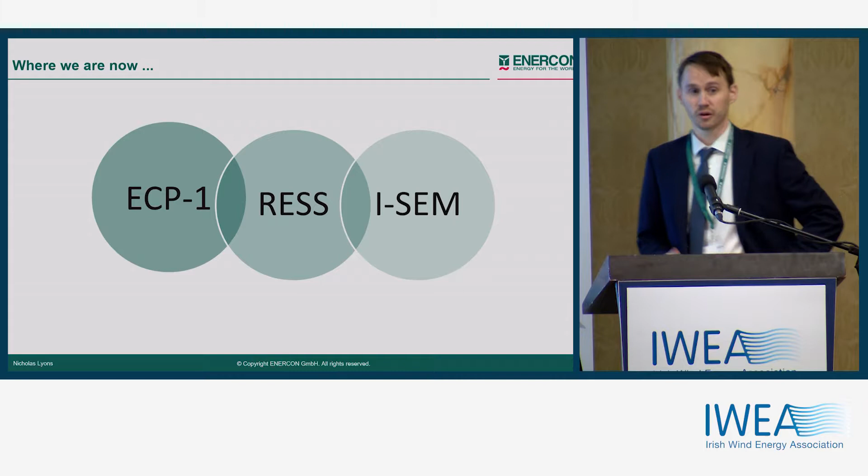So, ready for change, ready for new challenges. So we're very proud of what we've done. We have a good team on the ground. And as we look to the new challenges that are coming, we feel that we have the team to take

forward. We're looking to leverage that experience for our customers in Ireland with a full collaboration of services to offer a flexible level of solutions and strategies that will meet the customer's needs.

Whether that is pre-planning, site optimization, design, which involves a number of discussions between developers and planning consultants. We feel that this is a good approach and leads to very good optimization on site, and it's a good iterative approach to be involved in that process.

We'll also continue to offer EPC contracts for full turnkey contracts, taking on substations, cabling works, hard stands, roads and foundations. We have successfully done this across a range of projects in Ireland, and it works extremely well when there's tight deadlines or cost certainty is the driving force, which I think would be very important within the RESS 1 scenarios.

We have in the past offered equity to help projects cross the line, and we will continue to do this where traditional funds are not there to step in. It's yet to be seen whether this has much appetite with ECP1, but the offer is there.

Service contracts will, of course, be one of interest that we continue to offer with various options depending on the level of risk appetite of the developer. Either with limited liability or various structures in place depending on the actual appetite of our developers, your experience, or whatever your strategy is.

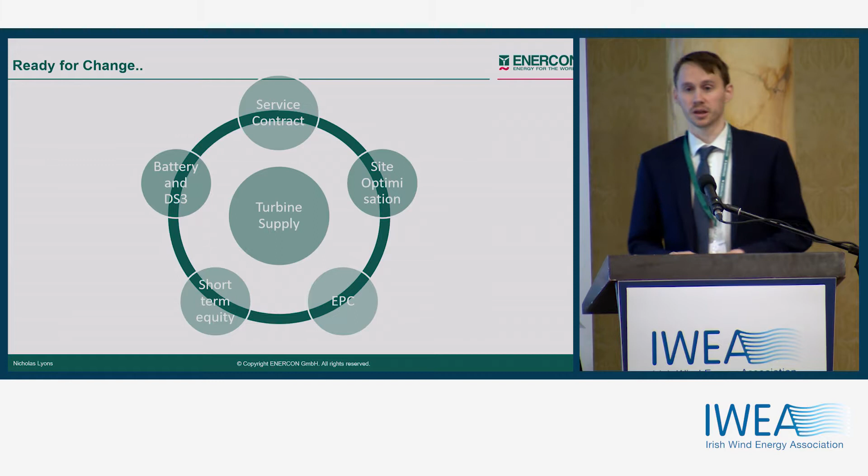And of course, we will also have additional supporting technologies, batteries and DS3 system services that we will offer to customers, and we will be chasing those DS3 capacity auctions. And of course, at the centre of all this is turbine supply. Yes, we do make turbines. So,

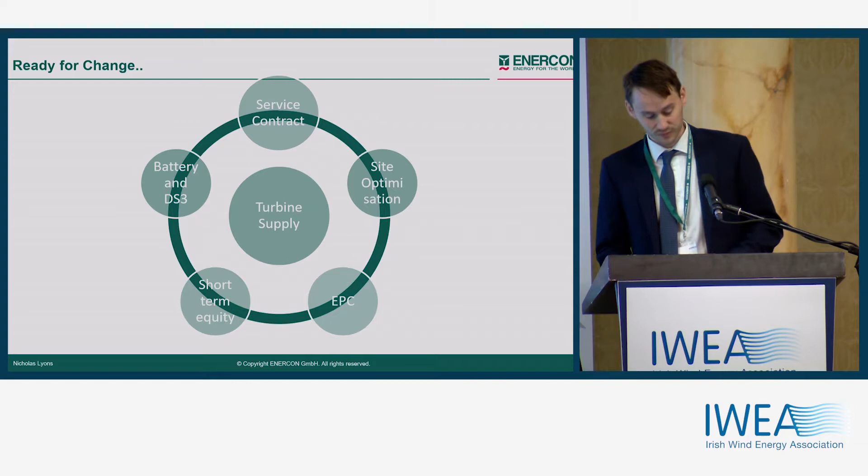our product range now, as we look at what was successful in ECP1, we will continue to offer the EP1, which is our sub-megawatt turbines, the E44s, and also we will continue to offer our EP2 platforms, which obviously was our traditional big seller, the E70s, E82s

and E92s. But we will also now, for RESS 1 and RESS 2, we think this will be the main area which will be most attractive to developers. This is our brand new platform, the EP3 platform. And this will be across a range of blade lengths, 115, 126 and 138.

Our new EP3 platform is a significant design change. The new EP3 platform has been designed specifically with auction systems in mind, with particular focus on reducing LCOE. We are just building on the traditional direct drive concept, which has been so successful for Enercon, with the key aim of lowering costs and higher efficiency.

The obvious change is the change in the nacelle. We no longer will have our lovely Norman Foster nacelle, we will be reverting back to the collar design, which we've seen more on the E40 machines from the 90s.

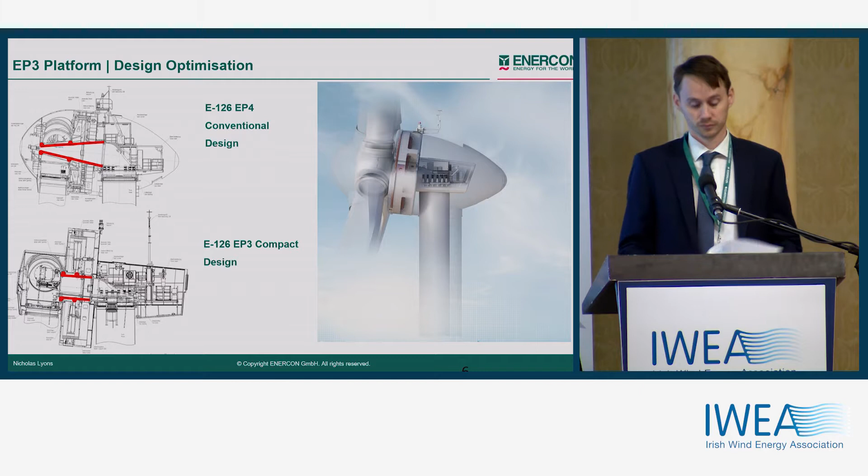The redesign brings multiple benefits in terms of on-site installation and reduction in on-site works. Components will become pre-made in the factory. Connections are easier on-site.

The other internal fundamental change is the generator. The generator traditionally has been hand-woven copper windings. This will now change to pre-formed aluminium windings. This obviously has inherent cost and weight savings. It's also simpler, faster production, again leading to better costing. Better protection against humidity, dust and air as it is also encased, and improved efficiency as the voltage increases.

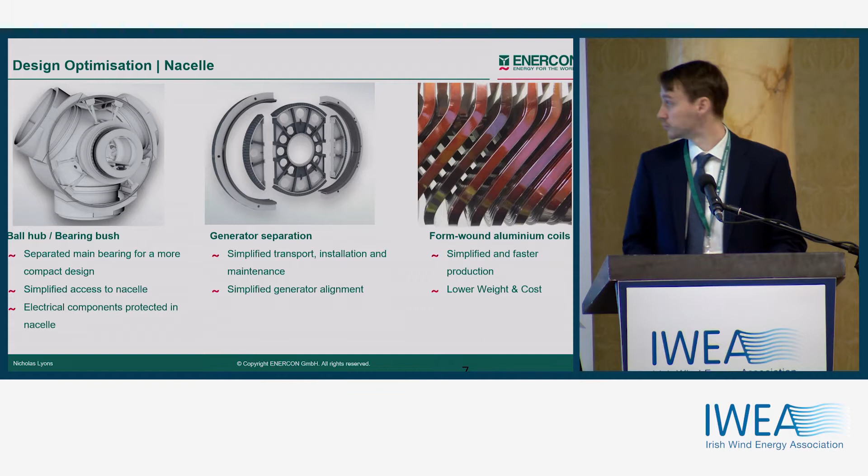We installed the first prototype in August for the E126, and as you can see, the actual installation times, man hours, have been drastically reduced, by over 50% reduction of assembly time. So these are all costs and installation costs that we will be passing on to the customer.

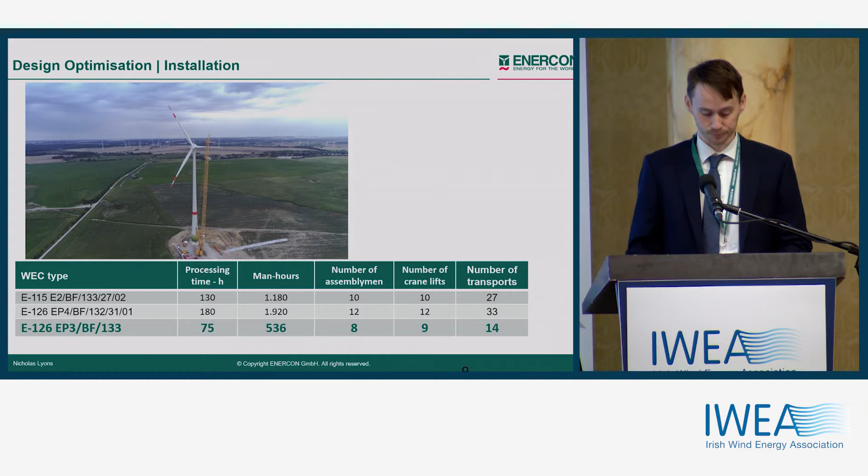Blade design, always a favourite topic of Enercon, very famous for very efficient design of blades. Previously with the EP4 platform, we offered split blades, but we are no longer offering that. It'll be one piece. This obviously has issues for transport, but the cost advantage is much more significant. And as we have shown in Tipperary, there are ways around these issues.

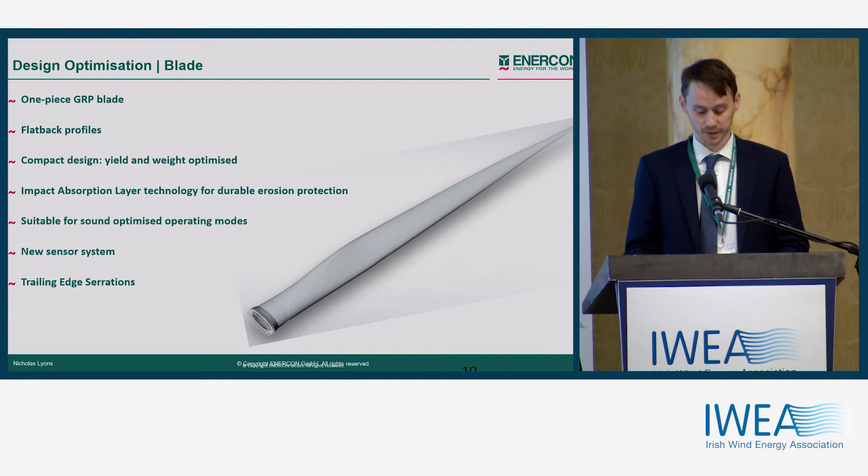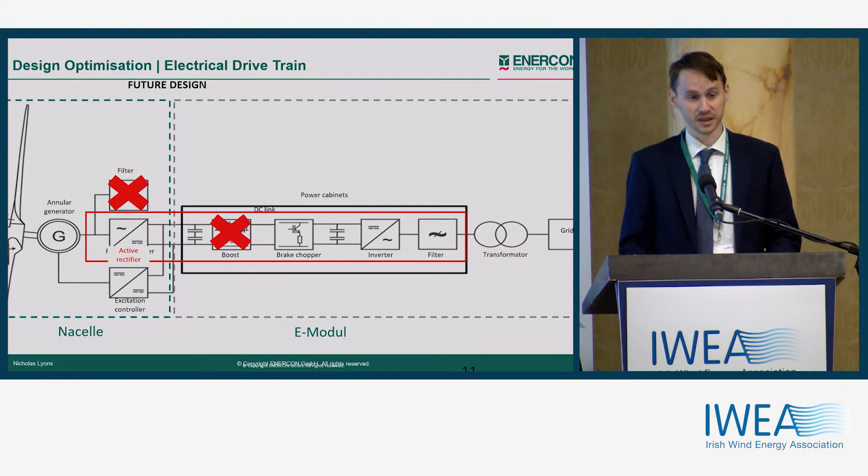So Enercon's success for the past two decades is in large part due to our direct drive and full inverter technology, which has only really been possible through our mastery of power electronics. Over the past number of years, we've been working away quietly in our research and development department in Aurich on a number of key innovations. These are our active rectifier and back-to-back inverters. This has enabled the move to aluminium as the voltage increases, and all of the preceding innovations and improvements that I've just talked about. Innovations in one area leading to improvements in others.

In effect, the rectifier moves to the basement, again reducing the weight in the nacelle, removing the filter and the boost within the power electronics. Again, reducing the number of cabinets, again reducing cost.

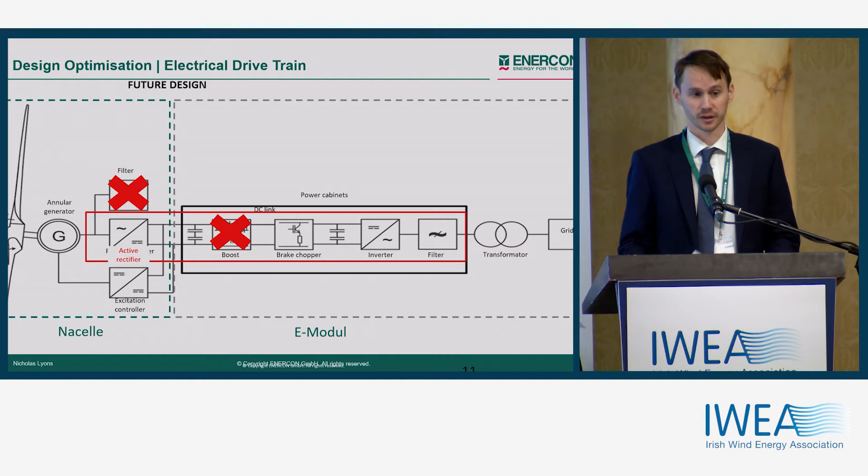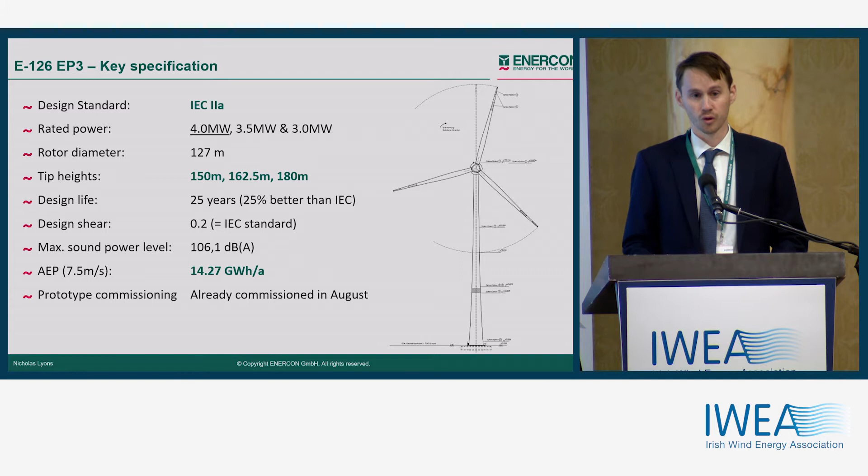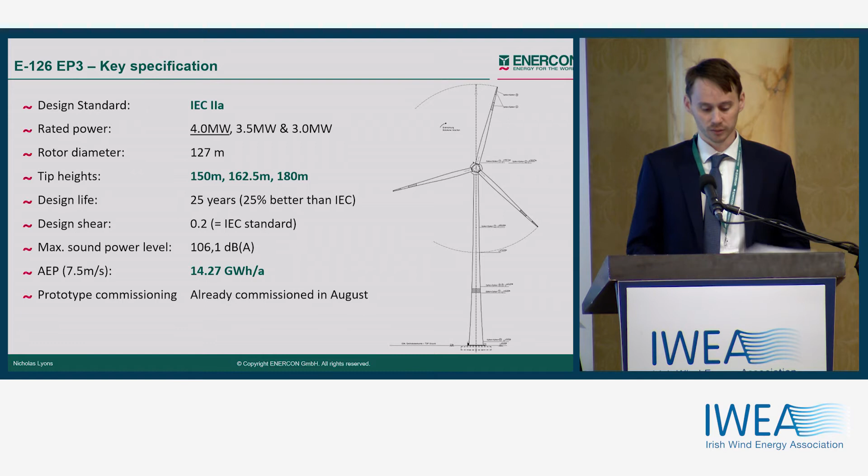So these are the key stats of our E126. It's offered as a 4 megawatt down to 3 megawatt machine, available at 150 tip heights up to 180. Design life of 25 years, so 25% extra yield compared to the conventional design. AEPs are pretty good. Sound level is 106. But we will have available a number of noise mitigation strategies and sophisticated noise reduction modes.

And this is one turbine we think is very attractive and kind of unique for the Irish market. It is a 115 metre rotor diameter and will have a tip height of 125. So we call it informally the daisy cutter. It is a reduction of about 30% LCOE based off our existing 115, and is also extremely quiet. So we can offer modes at 3 megawatt machines of 102 decibels. In comparison, that is about the noise of an E70 machine. So that is significant.

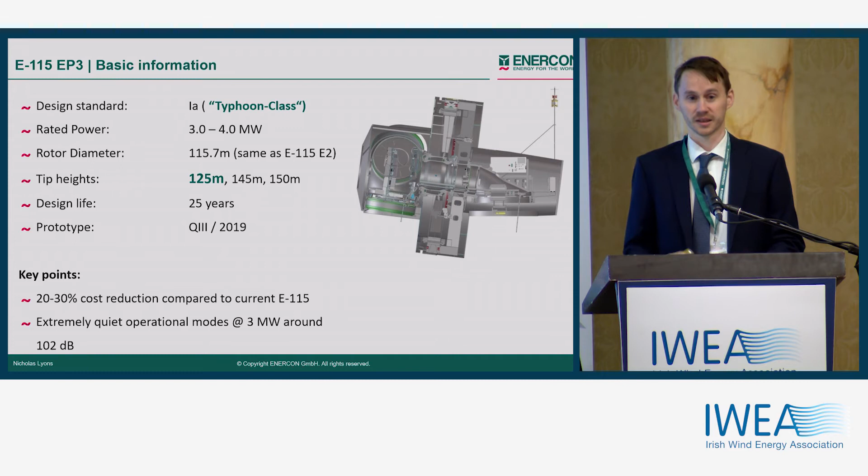So this is a slide that I thought was more of interest rather than having actual quantitative information on it, because it's kind of internal. But it's just to see the drop in LCOE across the range that we've now got. It's more indicative, and if you want the real figures, please come talk to us and we will give you the new prices.

And also, this graph is kind of interesting as well, and it shows the effect of 20 years as opposed to 25 years, the additional reduction in LCOE if you're modelling over the long term, depending on your assumptions.

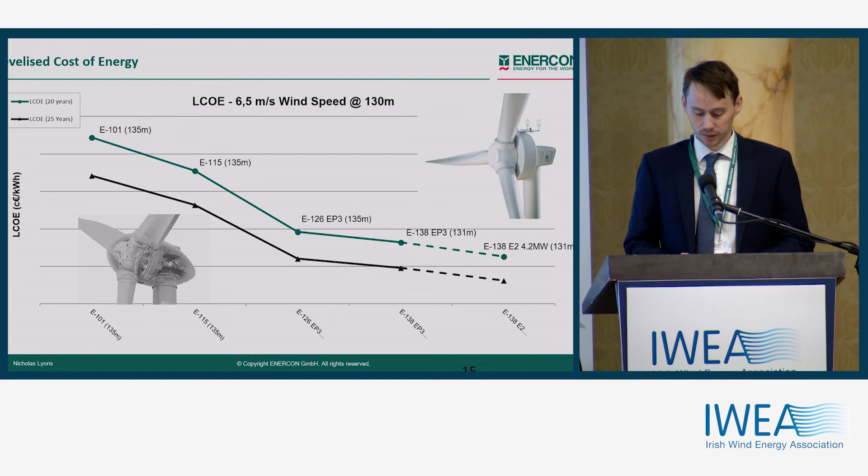There's been a lot going on across the industry, a number of mergers we've seen our competitors doing, and as a private trust with a very healthy balance sheet, Enercon has been quite prudent about who we are going to partner with, looking for synergies of cultural fit. And we really feel that with Lagerwey, who's also a very innovative company with lots of good ideas, we have found a good partner there. And also, as you look at their latest platform and our platform, they're very similar. The fundamental difference being we don't have permanent magnets, but that is it.

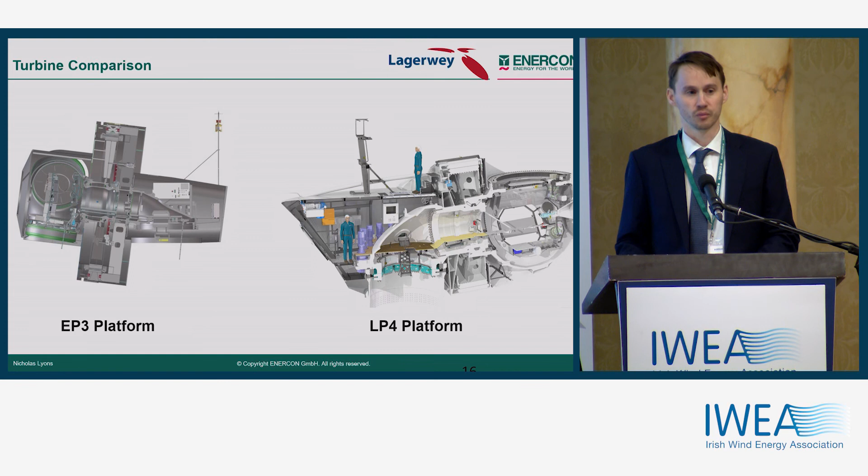We will be offering the LP4 platform for Ireland for the RESS 2 auctions. However, this only comes on 180 metre tip height, so it won't be suitable for all sites. So I hope that is it.